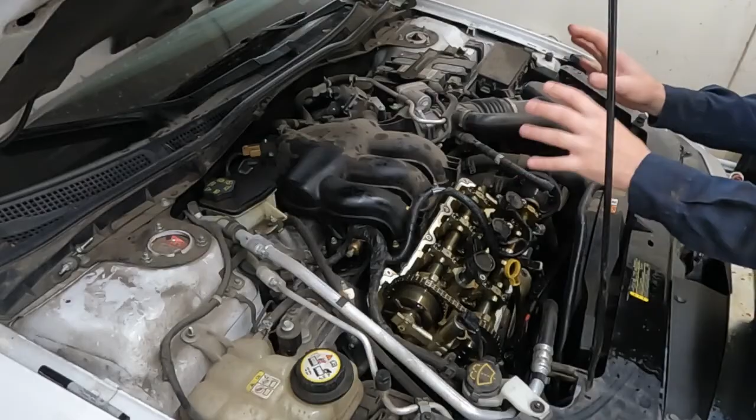All right, so this is where we are. We already have the front valve cover off because of the diagnosis. We had to pull it off so we could line up the chain and the timing marks. So we are already at top dead center cylinder number 1 because of our timing marks.

Getting this cover off is super easy. Everything is right in sight. You're just pulling off the coils, unplugging them, unplugging this here. This harness gets all moved out of the way, and the oxygen sensor comes unplugged. And really, it's just the perimeter bolts, and then there's 2 center bolts.

The dipstick tube, there is a bolt down here. You can get it with a 13mm ratcheting wrench or a little shallow socket. Well, actually, it has to be a deep socket - it's this bolt here, so it is a deep socket to get over this little stud. I used a ratcheting wrench, that was just really easy for me to get it out. But anyway, that has to come off to be able to move it just a little to get the valve cover up. That's the only kind of secret - otherwise, it's super easy to get to.

So the first thing we're gonna do is go down, pull the serpentine belt off, and get that crank pulley bolt busted loose and the crank pulley off. That's gonna be the hardest thing of this whole job. If we can't get the crank pulley off, then we can't really proceed, so there's no sense in pulling all this stuff apart if we're not able to get that pulley off.

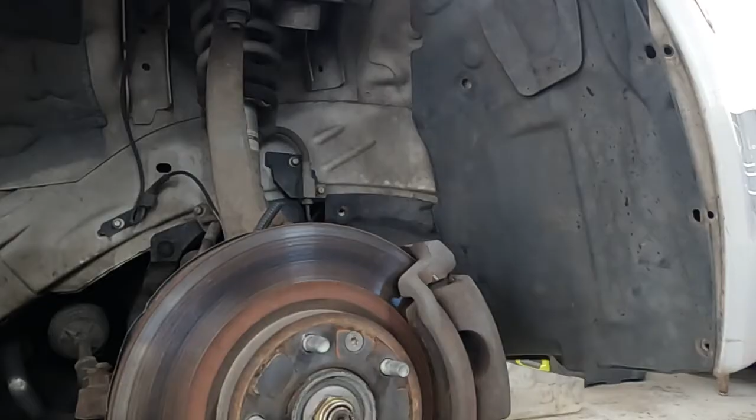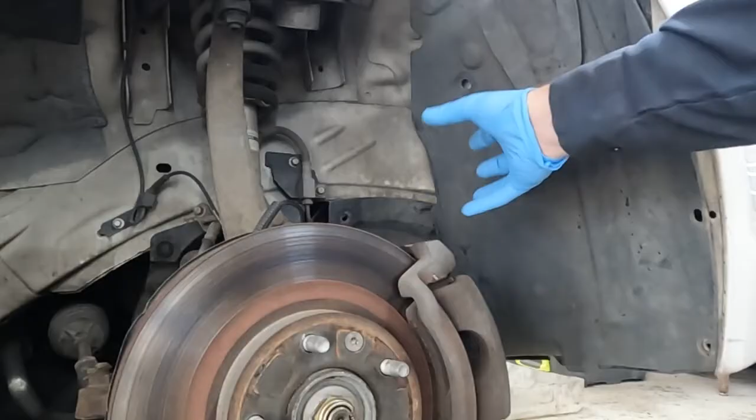All right, so the car is jacked up, took the tire off. We need to take this plastic off, there's just a whole bunch of clips. I already got some of the clips off so I can bend this plastic in order to get something on it so I can turn the engine to set the timing during diagnosis.

But it looks like in order to remove this completely, we have to remove even this bigger wheel well. It all looks like clips, at least from inside here, so having a pair of pliers like this is really helpful. I'm just gonna go along and pull all these. I got all the clips I can see. Looks like this just pops out of its thing like that.

And then that gives us access to these 2 clips here on the inside. Probably can't see it because it's in the way, but there's a clip there. All right, so now this little plastic thing can come out completely. Oh, there's one clip over here I left in. There we go, all right, so I think that's it.

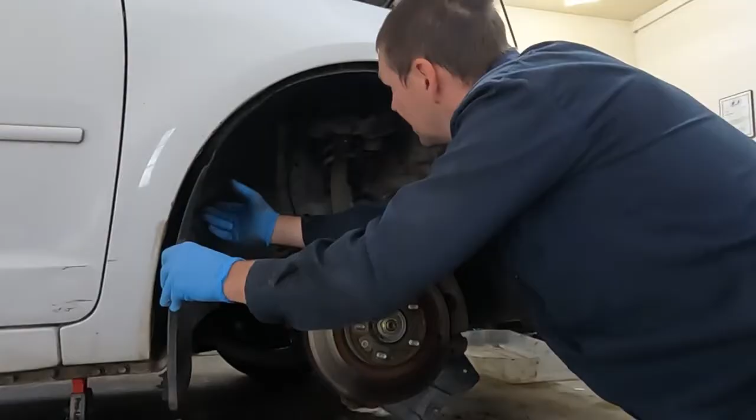I think we can actually put this back up. And I'm just gonna put one clip in it, just so it holds it up and out of the way. We just had to remove it so we can get this little thing off. Oh man, there's even one more - I guess there are a lot of clips.

Okay, so we just needed that out of the way. So now we got access to our pulley. Maybe we do want this out of the way completely - I'm gonna move this wheel well completely. It's a couple more bolts, looks like 1, 2, 3, maybe 4 bolts.

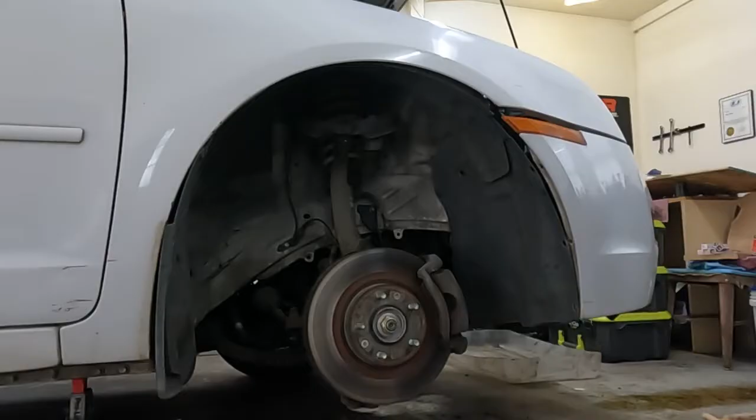Show you where I am, I'm just on the front underneath here. They're 7mm or 9/32, whichever one you got, and there's 4 of them. So now this whole thing will come out completely, and then we just don't have to worry about it. Not too bad, couple minutes and then it's completely open.

Crank pulley bolt is an 18mm. Didn't think my Ryobi was strong enough. Earthquake XT - for the price, this thing's a beast. Let's see if it can bust it. No problem, all right, so we got the bolt off.

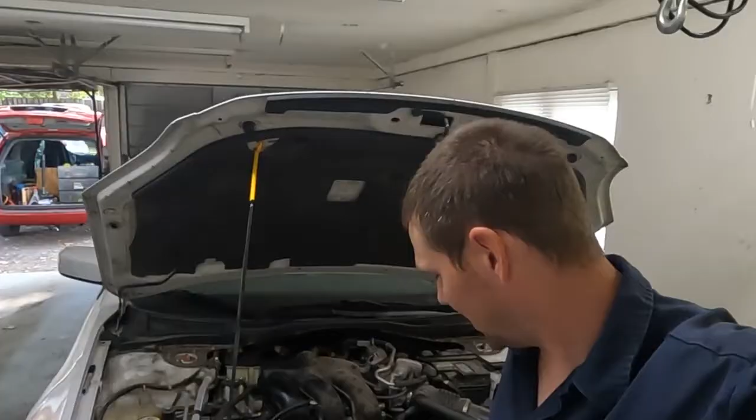Let's take the serpentine belt off before we pull this off. Now it's pressed in as far as I know, so we'll have to take a puller, a 2-jaw puller or a 3-jaw, and pop it off. All right, got the pulley off. Sorry I didn't film it - there just really wasn't a good place to set up the camera so you can actually see it, but I just got it off with a 2-jaw puller, nothing special.

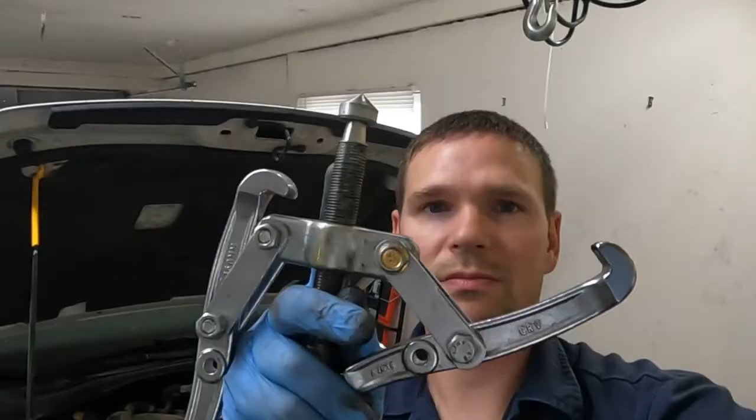Yeah, that's pretty much it. I had to use a little adapter because my puller shaft, the screw shaft part, wasn't long enough, so I used a socket as a little extension between it and the end of the crankshaft. It just fit right in, I think it was 19 millimeter or something like that, and that gave me just a little extra length to pop it out. It's not pressed in too crazy, so it comes out relatively easy, but we got it off.

Excellent there. Now we're gonna hop back up to the top, start pulling off the intake, the other valve cover, and working that way.

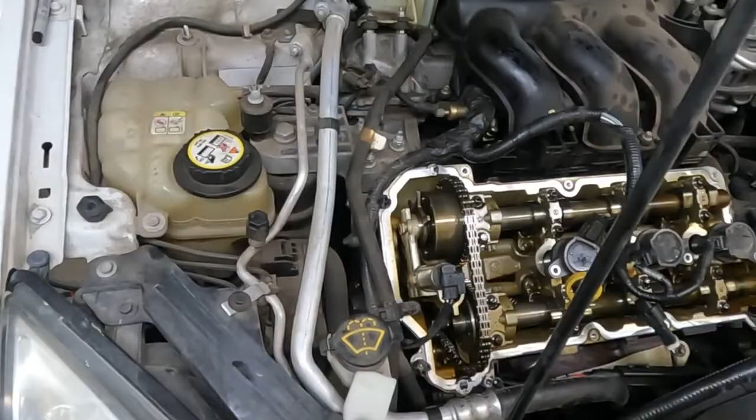I'm hoping the filming will be okay, decent enough. If I can't film it on the car, I'll maybe take a picture or film the manual. So that is next, pulling the intake off. We'll probably have to pull all the peripherals off of that before it comes up and out, and then we can get to that back bank over there.

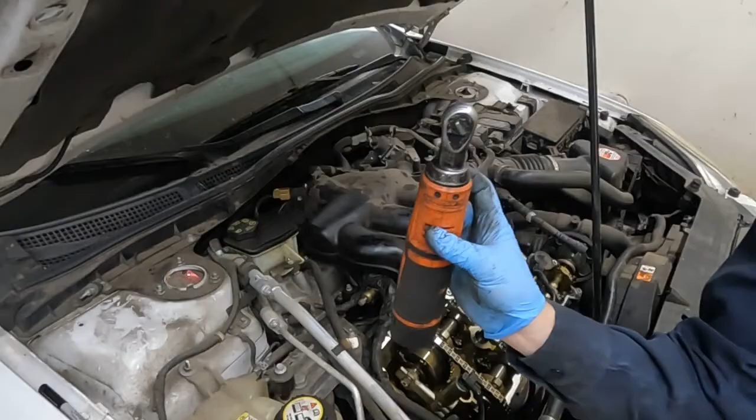I'm gonna start over here with the air box. Just pop this off, the electrical connectors. If it has this red tab on it, the tab just has to be pushed back out of the way, and then you pinch the connector and pull it off. I'm not sure why they do those tabs, like a little safety tab or something. A number of manufacturers utilize that style.

8 millimeter, a lot of these will be 8 or 10 millimeter. Pull that off, let me see if this will just slide off somehow. You want to separate this boot from this hose. There we go, it just pops off. Another 8 millimeter.

Loosens that up. Alright, put this right back here. So it didn't really have to come off, it helped coming off just to give me more room to pull on, but otherwise they can stay on. I'm just trying to think what else. You know what, let's take it off.

I'm gonna put the bolt back on just so we don't lose it. But we're gonna pull the whole thing off right here on the back of the intake, just with a pair of pliers. There we go, and that whole thing can just move out of the way.

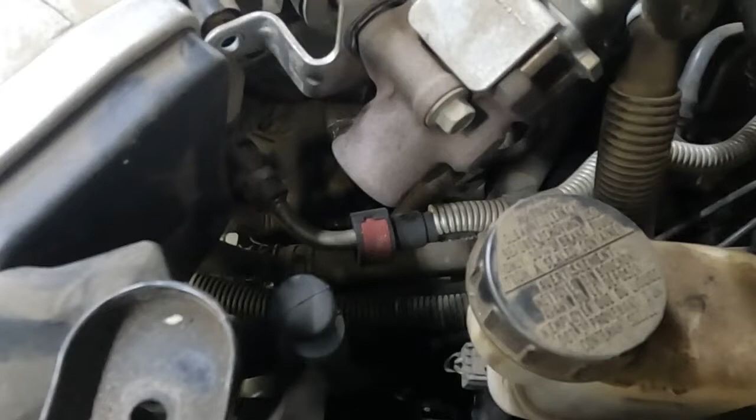Okay, we're stuck on something. Might just be this EGR if we pull it back enough. Not quite sure what we're hanging up on. Oh, I see. Let me pull you around and show you something I wasn't thinking was attached to it. I thought it was the fuel rail, but it's right back here - you see this red connector? That has to come off the throttle body. When I first saw it, I thought it was fuel rail related, but it's not. So we're gonna pop that off, and then we should be home free from there.

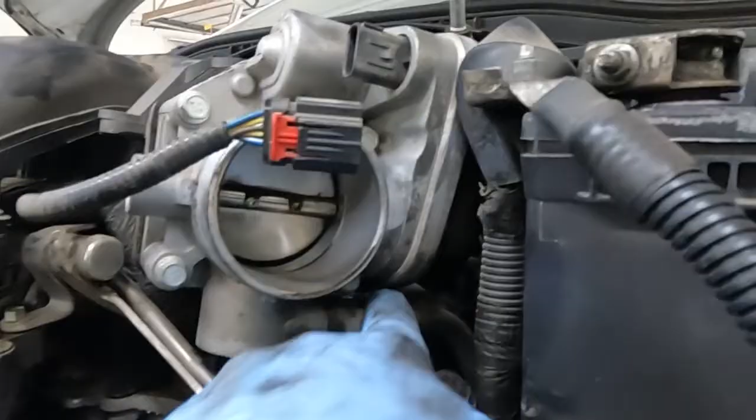So there's actually 2 more hoses at the bottom of the throttle body, right here and right there. What I'm thinking is we'll just pull the throttle body off. There's 4 bolts here, and it looks like it'll just separate from the intake, and then we don't have to worry about all those hoses. 10 millimeter, we'll pull those off.

So let's take this off. Before I do that, I am going to disconnect the battery. It's an 8 millimeter. Because we'll be working around the alternator and stuff, it's a good idea to disconnect the battery so we don't short anything out and regret it. I used to tell myself I'll be careful, but alright, so now got this one.

And I know some of you will be asking about these gaskets - should they be replaced or not? They are rubber gaskets, let me show you. As long as they're still supple, and when they're put in their little groove they extend out from the groove just a little, that's good enough. You can reuse these, but if they are hard, brittle, or no longer protrude from their groove, then go ahead and replace them.

Okay, so I think that will solve our issue. It only solves part of it because that red connector still goes to the plastic. Let me get some pliers, we'll get this off. Get a different pair. Okay, there we go. Now that should be it.

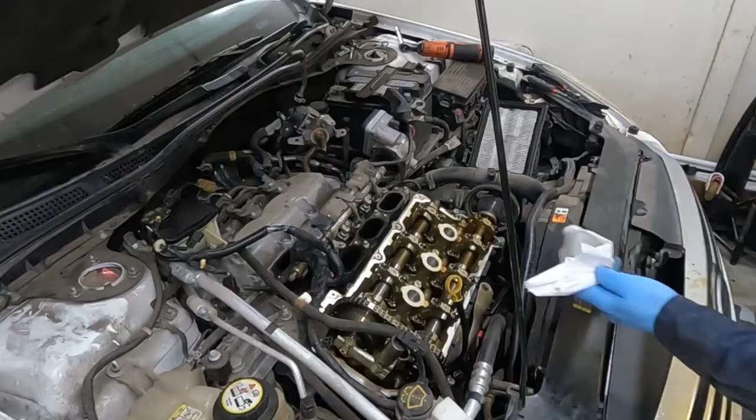Okay, so let's keep plugging away. Get this off, let me get a vacuum cleaner. We're just gonna suck up everything we can. And we are gonna put rags in the intake so that nothing falls down.

All right, so let's just start unplugging stuff. Making our way, we got this little - I don't know what that is, a little pressure sensor for the PCV system. We got all the ignition coils, can come unplugged. Remove the ignition coils.

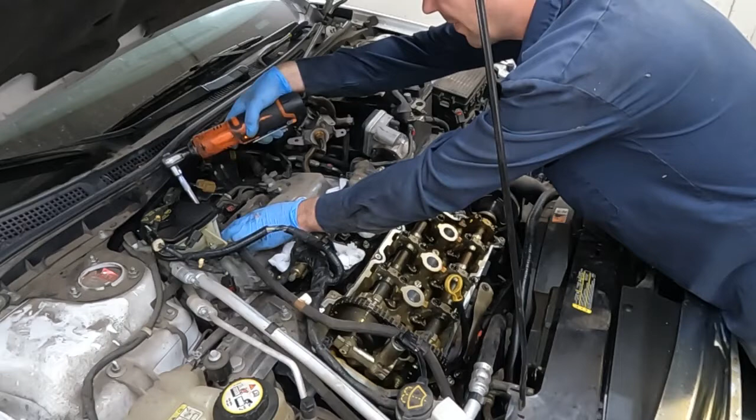All right, looks like this thing is gonna be next - power steering. Like I said, everything's either an 8 or a 10 so far. I guess there has been one 13 in the front for this tube. I think this power steering reservoir is gonna be a pain in the butt.

So there's a little bracket on the back with an 8 mil. I don't know if you can see it, probably not, but there's the variable valve timing solenoid connector on top. We'll pull that off, might need a flathead screwdriver to push that tab in. Disconnect this here too, it's like a little radio suppressor or something right there. And then we'll have to disconnect the cam position sensor once this little engine mount is off because I can't get my hand in there at the moment.

Okay, what else? I want to pull these studs off with a 10 mil ratcheting wrench. I have a feeling they're gonna get in our way. They're just the studs that held the power steering pump on, or the pump reservoir, I mean.

So in the back here, there's a harness connected to the valve cover, we're gonna get with these pliers here. Just pop them up. Okay, and then there's a bracket back here as well, held on by an 8 millimeter. You'll feel it with your hand. I'll pull you around and show you once we get more stuff undone.

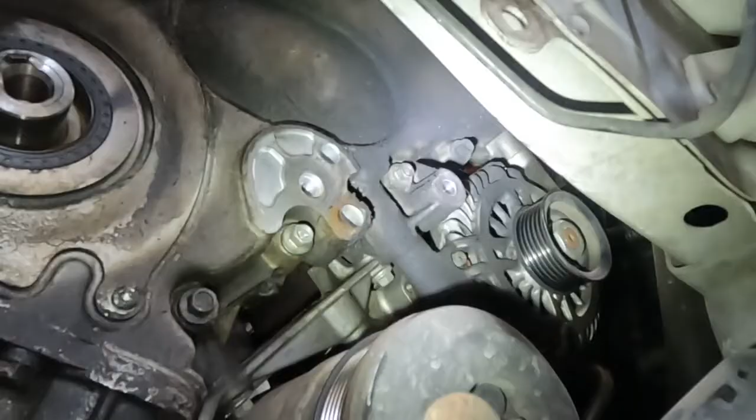From underneath, there's that one - that's an idler pulley. That one there is the tensioner pulley. And then another idler pulley right there. Those 3 come off, pretty easy, got enough room to get in there. No big deal. I believe it's 2 15mm and 1 13mm.

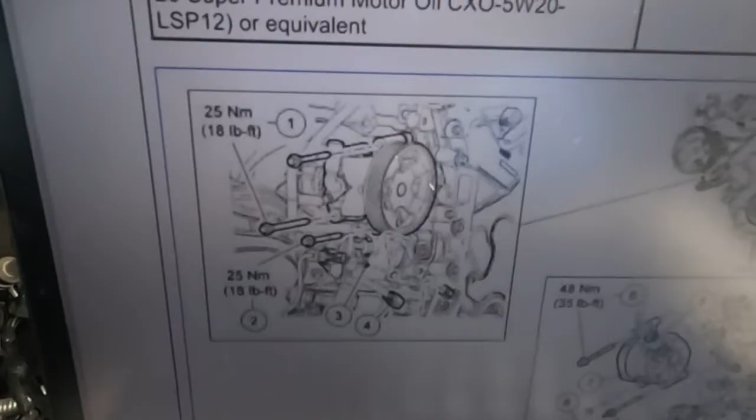So this is the power steering pump. There will be 3 bolts, 2 on the bottom, 1 up above. The one up above is a little hard to navigate with your finger, but if you look at the pulley here, it's just at the top and inside of that pulley, so you can feel it with your finger. I believe those are 10mm bolts.

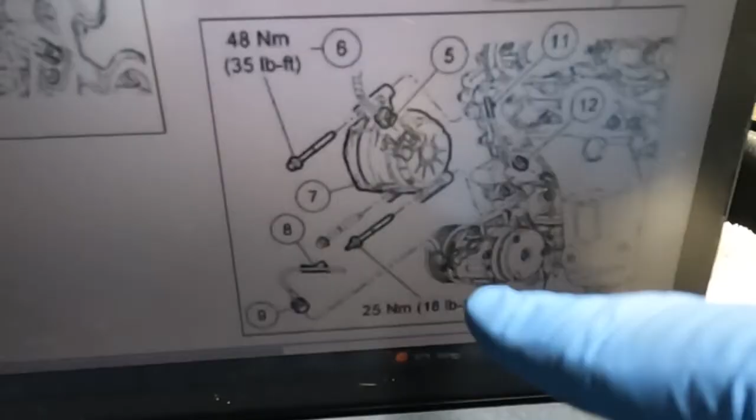Then when it comes to the alternator, kind of the same idea. It's right above the AC compressor. 1 bolt you'll get from the top, 2 bolts from the bottom. This is the front for the alternator, and right up above - let me point it out - right there is the top bolt, right under that AC line. This might be the hardest to get to, so I'd get that first while the alternator is held in place by the other 2 bolts.

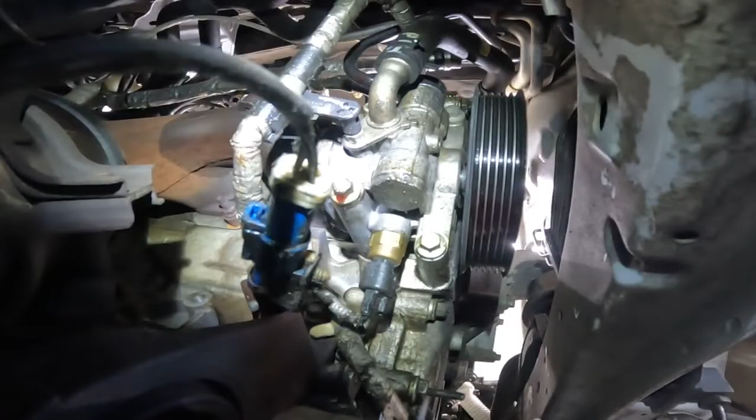All right, so I'm underneath the vehicle. I can't really show you that top bolt, but I'll put an arrow where it should be. You can feel for it, but there's those 2 bolts on the bottom you can get to fairly easy from underneath the vehicle. That one from the top, you'll just have to feel for it with your fingers, put that socket on there, and I believe those are 10mm.

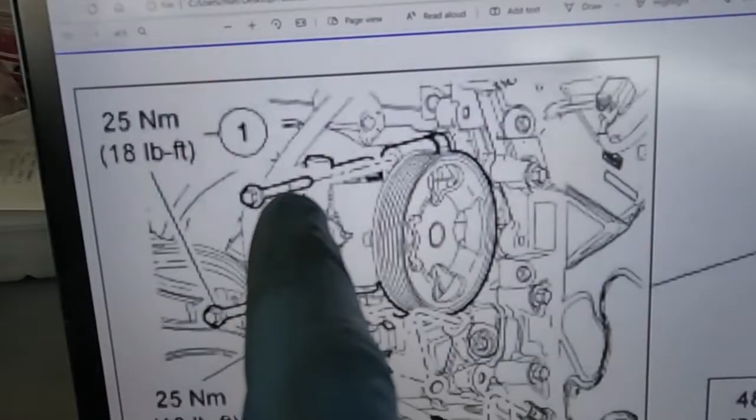I'll go ahead and do that probably off camera just because of the limited space we have to work with. On the power steering pump, in order to get access to that top bolt, there is a banjo bolt right here for the power steering line. That banjo bolt has to come off first, otherwise there's not enough room to get a socket or wrench on this top bolt. So first the banjo bolt, then we have access.

Just so you can see the banjo bolt, I pulled it up a little. It goes to this line here and just goes into the power steering pump. It's a 19mm head. Once you break it loose, it's not on too tight, and it pulls off pretty easy, giving you the room to get that bolt off.

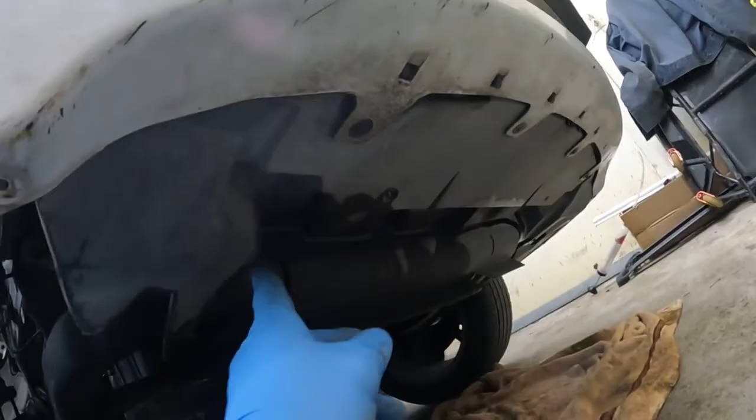So I'm going to remove this front splash shield because I can get to the alternator bottom bolt from here at an angle, going in with a long extension and a socket. It's just a matter of these little screw fasteners, and then a couple of clips that pop out, and this whole plastic shield can be removed. Now with that off, it gives us access to that bolt there.

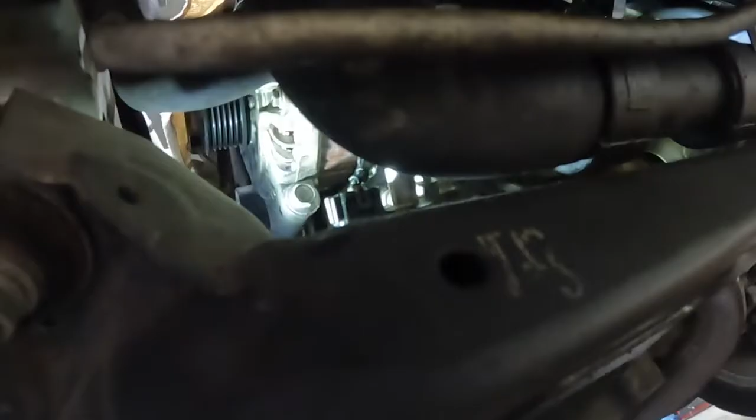Also, while I'm down here, I'm just going to note this for the customer - there's a lot of dirt and oily stuff all over that AC condenser. That's going to block the flow of the AC and block the flow of the radiator to an extent, so I just want to point that out. Pretty nasty looking, all up in there, you can see.

All right, alternator and power steering pump are out of the way.

What also helped get that alternator bottom far bolt was having a little wobbly extension as well. A long extension and a wobbly going up through the frame right underneath that lower radiator hose - that's what got that. The other one on the bottom, further in, is just a deep socket, really easy to get to.

So now I put this motor mount back on because I knew I wasn't gonna be here for a couple days. I didn't want the jack just sitting under it in case the jack bled off. So I put this back on. So now, next move, pull this back off.

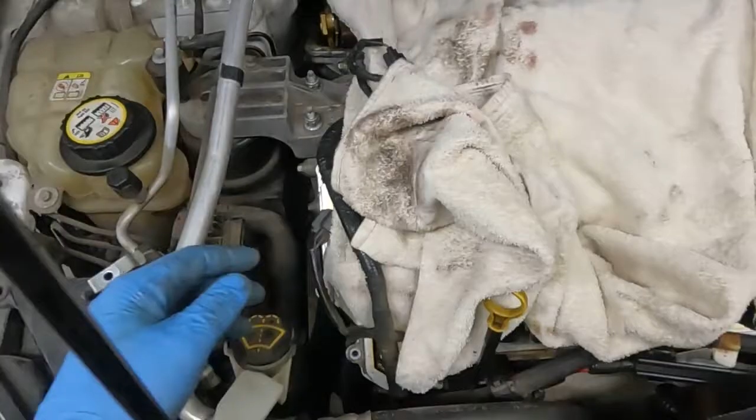We gotta pull this off because this motor mount down here has to come off. So just a couple of bolts here, and this just moves out of the way enough to get those other bolts. This whole mount can come off. Again, we'll have to put a jack underneath, jack it up with a block, and then we're ready to pull the front cover bolts off, and hopefully this front cover just smoothly comes over and up.

All right, for our coolant bottle, we're gonna want a 10 deep. Just 2 of those. Hopefully everything will play nice, and it'll just be easy to maneuver. But no, it's not.

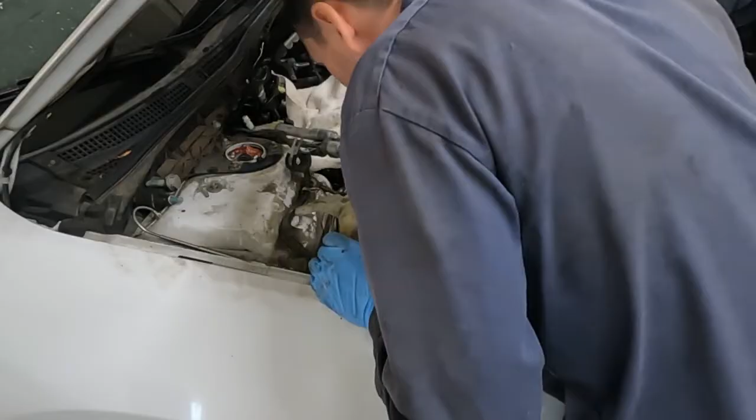See if that gives us more room. Nice. Now we got this one down here. And I'm really hoping to not have to drain the coolant. So that gives us, I think, all the room we need.

Let me see if I can get a socket in on that one. Okay, so these are all 15 mil, so having a 15 mil with a really long extension - yeah, should be able to get all of them. Oh wait, there's this angled one I wanted to see. Yes, so just up like this is all it needs to be. Let me move you around. So we'll get this angled one right here.

Okay, comes off pretty easy. And we'll get these 2 straight down ones. Okay, that one's not coming out. Let me do this other one. That one came out, so this front one's kind of struggling.

I'm just gonna use a breaker bar. I think having the extension is a little too wobbly, so it loses its power. Let me try again. So that bolt broke coming out - just something to note. All right, let me put the jack underneath real quick.

We'll jack up the engine and then pull these off, and this whole thing should separate. All right, these are 15. All right, this should just come out like that. Just put this back with it. All right, now this thing should also come out.

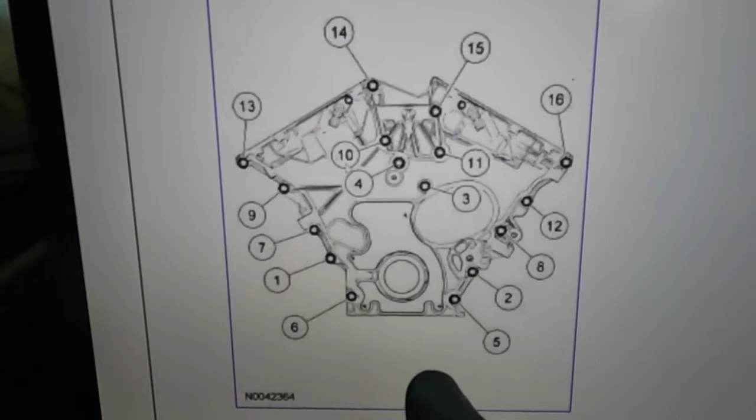Now we're ready for the front cover bolts. A series of bolts on this side, looks like 1, 2, 3, 4, 5. A few in the middle up top, and then 1, 2, 3, 4, 5 on the side. And then this doesn't show it, but there's 2 on the oil pan - so 2 on the oil pan in the front there also come off, and then the cover can separate.

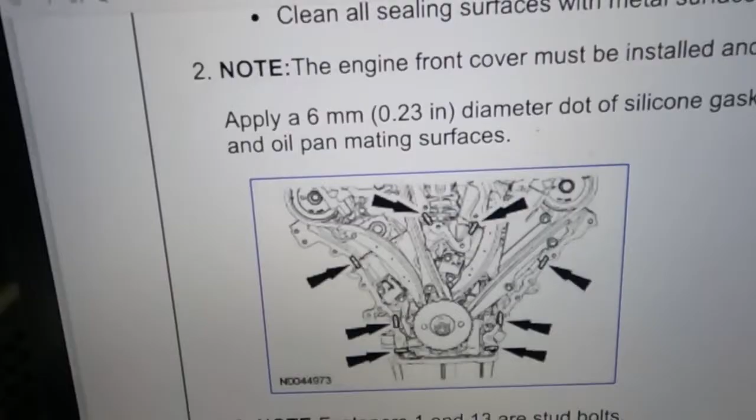Now there is a gasket right here. You can see a gasket, but there's also RTV. So it may stick - you may need something to pry on or pull on because it may stick on those RTV spots. So let's start pulling these bolts off.

Two things to note. First, the crankshaft position sensor needs to be unplugged. And then the cam position sensors up top, we want to take those out. It's an 8mm bolt, you just kind of wobble them out. Then make sure that O-ring is still good before putting it back on. If that O-ring gets damaged or it looks really flat, no longer above its groove, and it's not supple anymore - it's just kind of hardened - then we'll want to get a new O-ring before reinstallation later.

There we go. It was just gluing itself to the RTV. Just keep pulling - I want to be careful where we put our pry bar. You get a vacuum cleaner right in there real quick.

All right, got the front cover off, the timing cover. Let me show you real quick. So look right there, I put an arrow on it. I'm gonna pull up on the chain and look at that tensioner.

See how it sucks in? It's not supposed to. There's supposed to be a ratcheting mechanism that prevents it from being sucked in like that. The other one on the other side, when I did it, that ratcheting works so that you can't - that's all the loose it'll get. This side, total failure of that timing chain tensioner.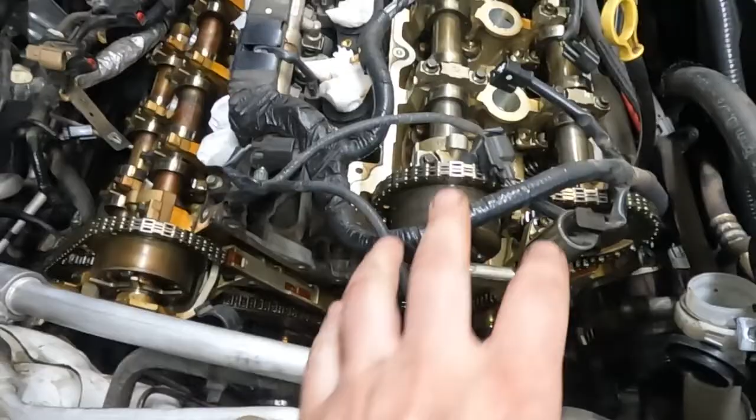Another interesting thing, if you look at the color difference between the two heads, this is kind of a gold color between the cam lobes and the phaser. That's just varnish that happens over time as the engine oil heats up, often from lack of maintenance. But on this side, nice and shiny, the phaser's nice and silver, the cams are silver, everything looks new. Makes me wonder if this head had been off at one time before, maybe it's a new or rebuilt head. Just interesting, doesn't really mean anything.

All right, we got the front cover off. That's a big win. The hardest part of this whole thing so far has been the alternator and the valve cover on that firewall side, those two were kind of a challenge. Other than that, all the other bolts are pretty simple.

Let me show you real quick on the front cover, there were two bolts that I missed, so just something to keep in mind for where all the bolts are. Other than that, just patience, a lot of patience, your hands might get banged up a little in a few places. Let me show you the front cover, then we'll take a nice break and start changing out the timing components.

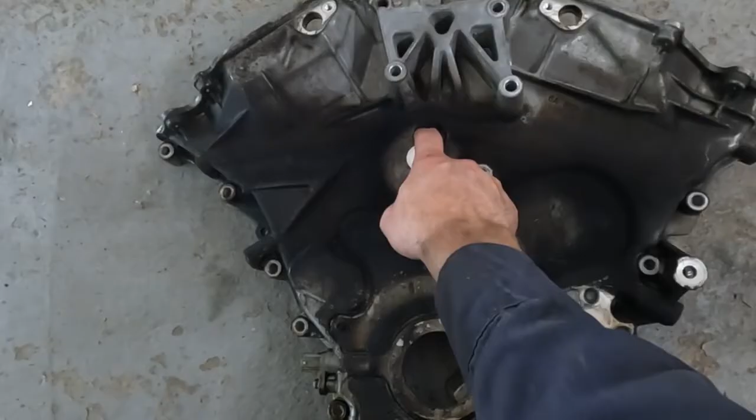There's this bolt here, kind of hidden from your eye view, with a bolt inset there. And then a bolt here, mine was just dirty and I overlooked it. So those two bolts in the middle, and then we have five on the side. Two of these, the bottom one and one up here, are studs. Those are 15 millimeter bolts, the rest are 10 millimeter. Then you have the two for the oil pan, those are 13 millimeter. Other than that, then prying, you just gotta be careful where you pry.

Let me flip this over. You don't want to pry anywhere that's going to damage these sealing surfaces on the head side. Same within here, you don't want to damage the head side sealing surfaces. And when you're prying in this little valley here, you just want to be careful of the cam, phasers, the tone ring, and all that. You don't want to bend any of that or you'll have drivability issues and have to pull all this back apart.

So our next move is taking care of the timing components. I'll launch you over to the computer so we can see step by step the process. Filming's not going to be the best because of the tightness and angles of things, but the tensioners come off, the guides come off, and the chain can slip around stuff and come off. We want to set cylinder number 1 to top dead center, I'll show you what that looks like. Once that's set up, then we can start pulling off the tensioners and guides and stuff. Let me show you that real quick and then I'll launch you over to the computer.

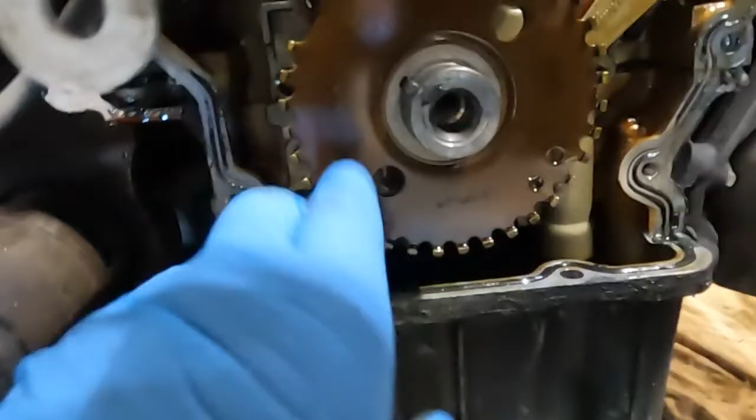So this is the left bank. You want this timing mark right here, kind of matching this plane on the head, and then the crank pulley, or the crank keyway, you want at 11 o'clock. If that's at 11 but this mark is over on this side, then you're 180 off, go ahead and spin the crank one more turn to make it 11 o'clock, and then you should have that mark there. So that's how we know. Also, this mark here is kind of straight up and down on the rear bank or the right bank over there. And now we're set at top dead center.

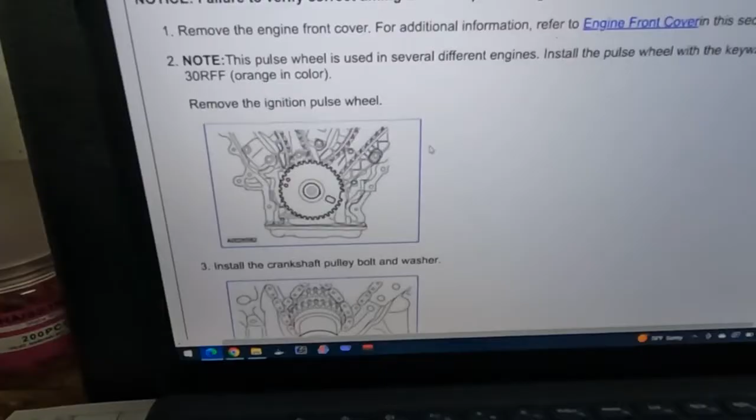All right, so we want to pull off our tone ring right here. The pulse wheel is used in several different engines. Install the pulse wheel with the keyway in the slot stamped 30 RFF, I'll show you that when we pull it off. But there's actually two little keyway slots on that tone ring, and we can actually put it in the wrong place because they use this same tone ring on two different engines, or multiple engines, it says. Pull the spark plugs off, that just helps rotate the engine a little better with the spark plugs out.

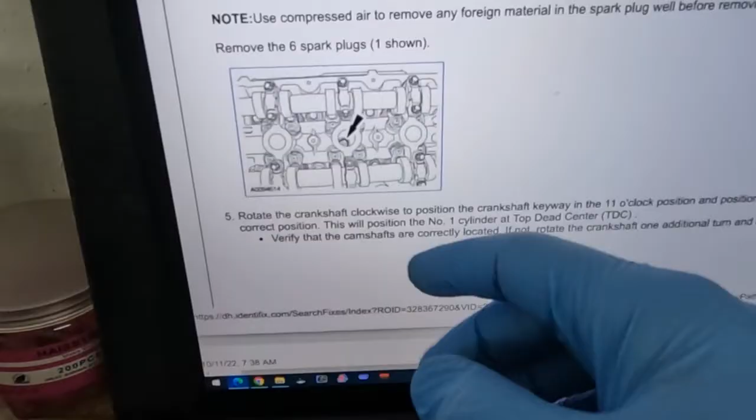Then you're not getting fighting compression. Now this is saying pull off the VVT assembly here. I'm not sure if you have to do that. I'm going to try and do that without doing that portion of it, but that's what it's saying to do.

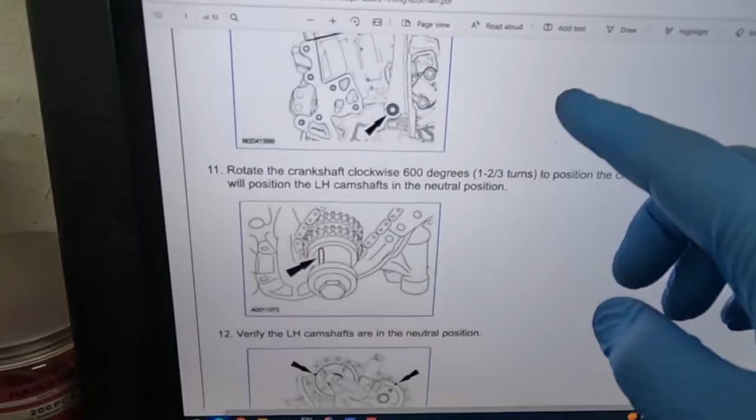Usually if they say it, then it's because it's needed, but I'm always trying to find ways around stuff. So you want to do the right hand and the left hand separate. All right, so these are the important steps. First we want to put the crankshaft keyway at 11 o'clock. These are the marks here, the timing marks when you're at top dead center.

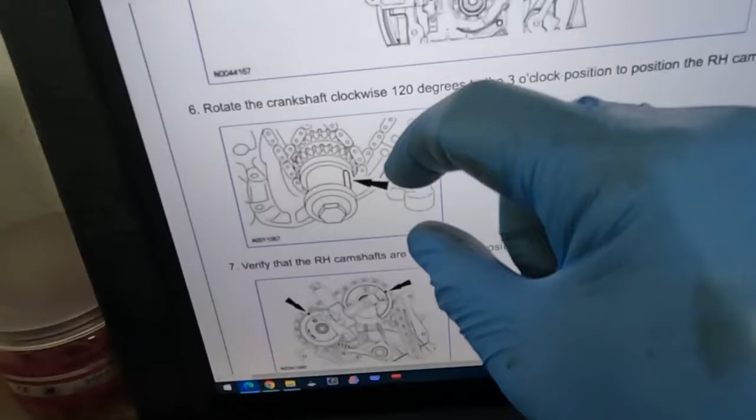But then it says rotate the crankshaft clockwise 120 degrees to the 3 o'clock position. So now the crank is at the 3 o'clock position there instead of the 11 o'clock. And that puts the right hand camshafts in the neutral position. And then this should be the timing marks there on that right hand cylinder head. Now this timing mark goes off to the right. It's no longer straight up and down, but it's over a little.

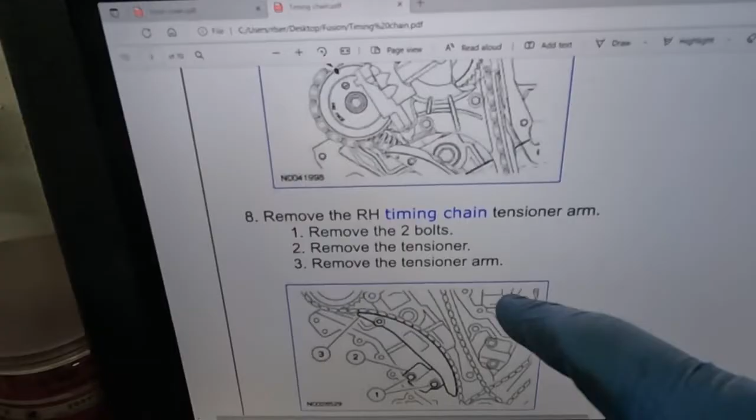Now we can go ahead and remove the 2 bolts for the tensioner, and then that tensioner arm, that arm here, we could pull off as well.

So on the vehicle, the manual was saying take off this VCT solenoid assembly here. You don't have to. Once you get the timing chain off of the exhaust cam, you got plenty of slack that you can just slide it right over. So this doesn't have to come off like the manual's saying. They may have you taking it off because it's explaining a deeper teardown than what we're doing. But just to get the chain off, you can leave this on.

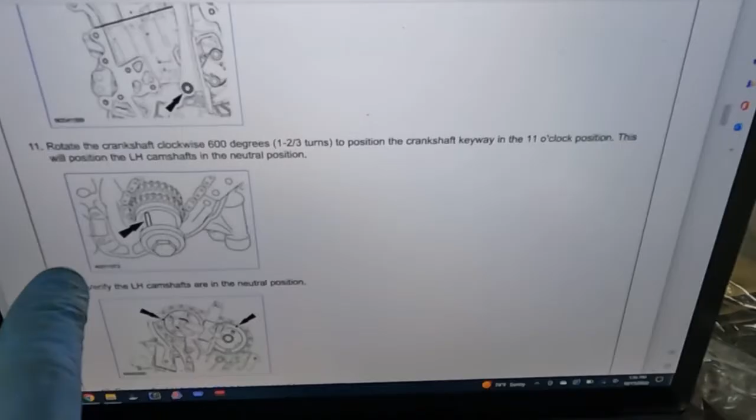Once we have that right hand side off, then we can go ahead and get to the left hand. We want to rotate the crankshaft clockwise 600 degrees. So that's going to be another full turn plus 2/3 of a turn to put it back at that 11 o'clock position. So that's all we're doing, is putting it back at the 11 o'clock, but not one turn to get it back. We want to do one turn plus an additional to get it back at that 11.

And then once we got that lined up, go ahead and do the same thing. Remove the tensioner, or remove that guide or that tensioner arm.

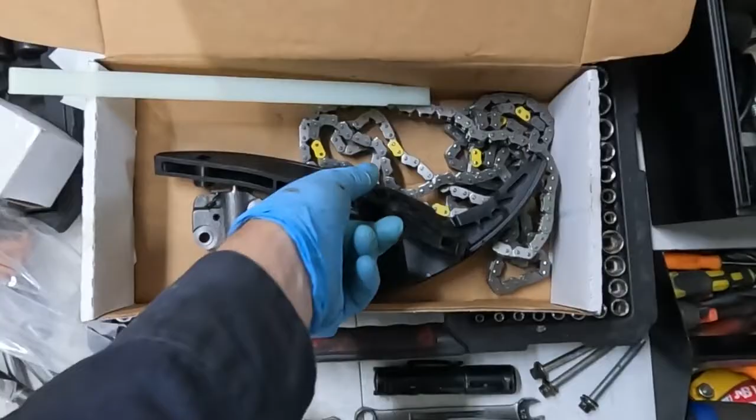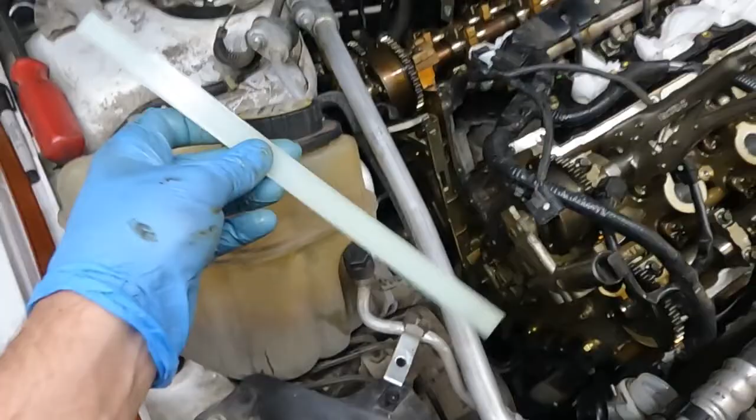So here's the kit. It's just a Cloyes kit. It looks like the chains, the tensioners, the guides, and everything are not side specific, so it doesn't matter which one you put on which side. They're identical components. For these strips here, they go on these long runners here. There's one here, there's one right here. On the back side, there's a little tab that you just pull and push, and then this whole thing can come out like that. And then a new one can get slotted in. You can see these little slots, they just slide right in and lock into place.

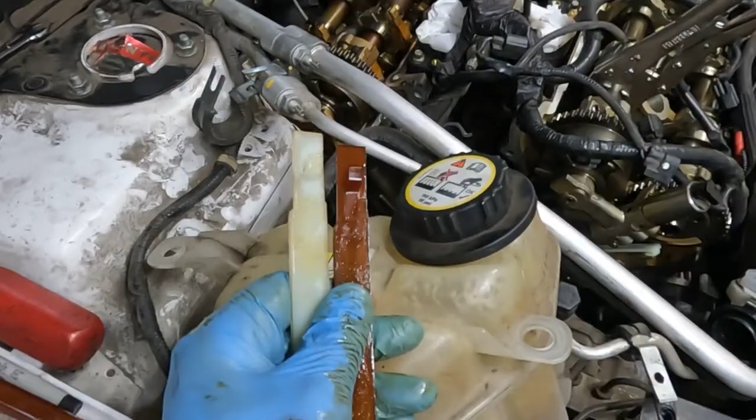All right, real quick, there's a difference on these right there. You can see it, I'll point it out with an arrow. I think it's just a manufacturing kind of hiccup. So that on the new one needs to be cut off or just trimmed just a little because it's not on the old one, just that little nub there.

So now all you're doing is taking these chains. They have these yellow marks here. The 2 closer ones go on the cams, and then that one goes on the crank. And all you're doing is lining up that tooth over that dot on the cam. And then there's another dot right here on the cam.

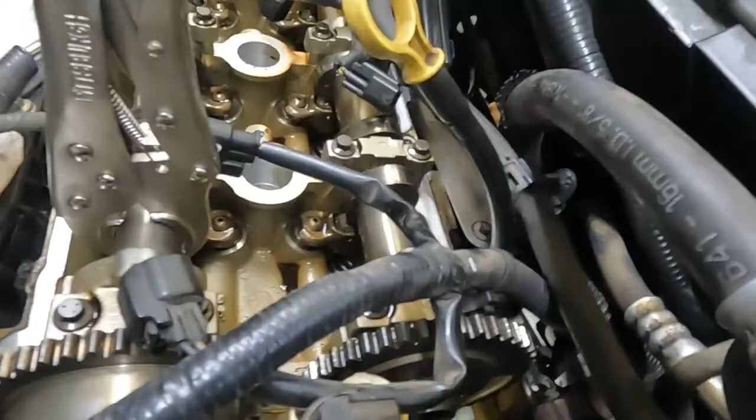And this cam is gonna have to be moved just a little by hand manually. No big deal, just use a pair of vice grips, not on the lobe, but just the shaft in between the lobes. And then you can move it just ever so slightly as needed. No big deal. And then same on the bottom. You want that bottom yellow on that little mark on the crank, and that will line up our left hand.

So this is what yours should look like. On this side, I have that yellow mark right above that yellow tick.

Same on this side, yellow mark on the yellow tick. And then to get this little tensioner arm on, I had to use a flathead screwdriver and push on the chain a little to get it over, just enough to slide this behind it.

Now down on the bottom, our mark is right in line with this front tick, so perfectly straight back. So now our crank is set. If you have to move the crank, that's why I have the bolt back in. If you have to move it one way or another, just a couple degrees to get that tooth to line up, that's no big deal. It's perfectly fine. Just like we moved the cams a smidge to get those marks to line up, it's perfectly okay to do the same on the crank.

So that tensioner is tightened to 18 foot-pounds. And then to do the right side is the exact opposite of how we took it off. So we turn the crank 120 degrees to make it the 3 o'clock position.

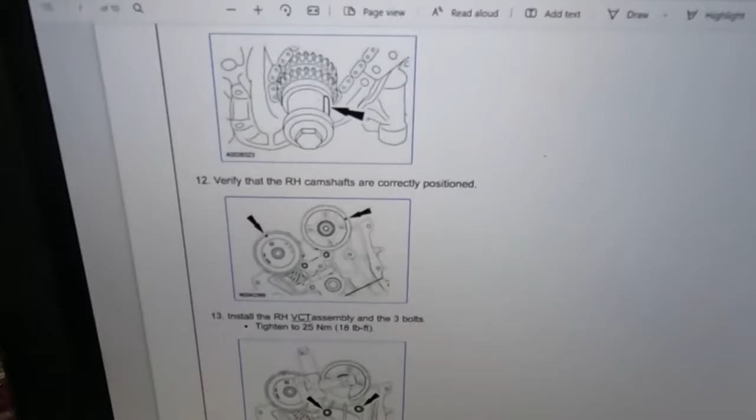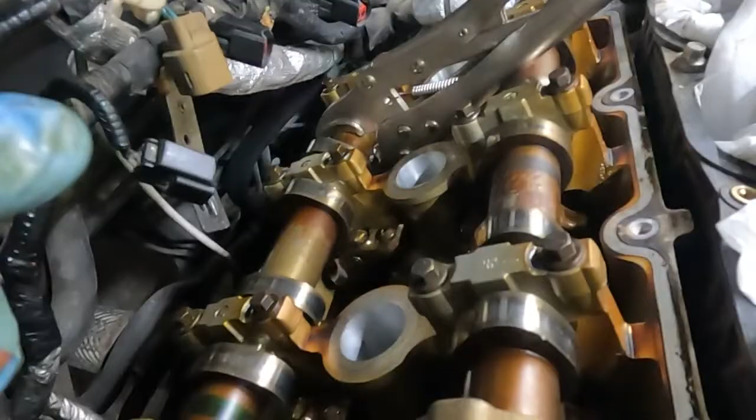And then we go ahead and do the cams just like we did on the left hand, putting that yellow mark on the little indent on the cam, same with the other cam, and then line up the crank. With the 3 o'clock, now our front one is going to be lined up with that dimple just like the rear one was. And then up here, again, we want it to match up. And then that back one is kind of hard to see, so you can get your phone back there, take a picture. That's what I ended up doing, so we can see right there that back one is lined up.

Double check these marks, make sure they're still lined up. They're still lined up. And then down there on the crank, they're still lined up. Now we can go ahead and pull our little pins. So now we'll turn the crank twice. That little keyway is at 3 o'clock. We'll go all the way around and then back to 11 and check our marks one more time. Make sure nothing internal with the valves or anything is getting stuck on anything, and it's just a nice smooth rotation. All right, so we are back at 11 o'clock.

So we just want to make sure these line up. Our colored links will no longer line up, that's okay, that's normal, we just want to make sure this goes back where it's supposed to go. This is now more parallel, just like we wanted, just like this. So that puts this side back to where it should have been from the diagnosis. This one is right there, the other one is over here, so it looks like they're right where they need to be. And then the bottom, of course, it's not gonna line up with the marks, but you can see we're at 11 o'clock there.

We can go ahead and take this off, and we are ready to start prepping the surfaces of the head and the block. And then the oil pan, we just want to wipe that rim really good with some brake clean. Wipe all our surfaces off really good. Get any of this leftover RTV, we want to peel that off and get it out of the way. Now don't use a metal scraper, we want to use a plastic scraper to get all that, because we don't want to score up the metal with a metal scraper.

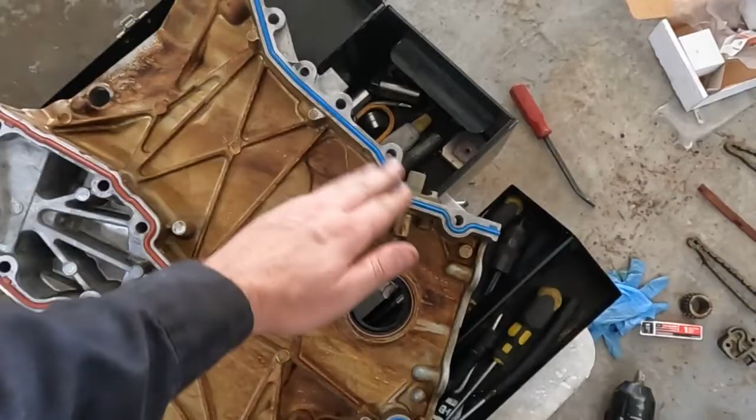We got the gaskets, now they only go on one way, so you can't get them wrong. And then, so first, before you put the gasket on, clean up this surface really well with some brake clean, get all the grease and stuff, because that's what the silicone is going to stick to in a few places. Then go ahead and lay your gasket in, and that's it. Then your front cover is ready to go.

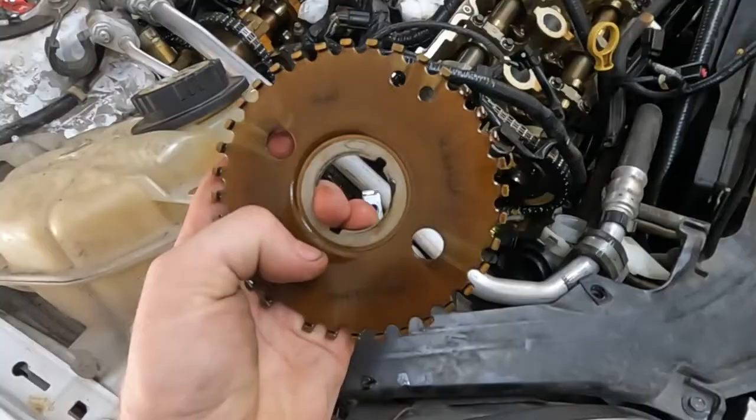Last thing before our front cover goes on is this. Now you notice there's two different keyways that it can line up on. Here it says, hopefully you can see that, glare's kind of bad, but it's 30 RFF. It's this one right here that we want. It is also stamped front, so you don't accidentally get it turned backwards. It only goes on one way.

All right, so I'm waiting on some RTV to come, so I think this is a perfect time to take a break. But when we come back tomorrow, we'll slap everything back together, fire it up, and listen to it roar.

Good morning, it is the next day. Today is the day. We're gonna get this thing put back together and back on the road. Let's get started. So this is where on the vehicle we need RTV.

You can tell on the vehicle there's a little crease right here because the head meets the block, there's a little crease. Where the bottom pan meets the block, there's a little crease. So you just want RTV in that crease, the corner. Now I'm going to go ahead and just RTV the entire lip of that oil pan, just because I don't want to leak.

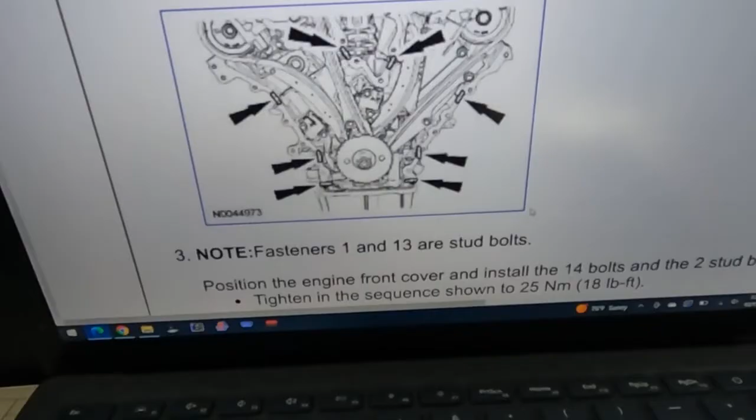And that gasket isn't as malleable as I would like it. It's a little too stiff, so I'm just gonna RTV that whole lip. And then on this side, again, a crease, and then in the middle, there's 2 more creases. And you'll see them on the vehicle, what we want. Let's see what it says.

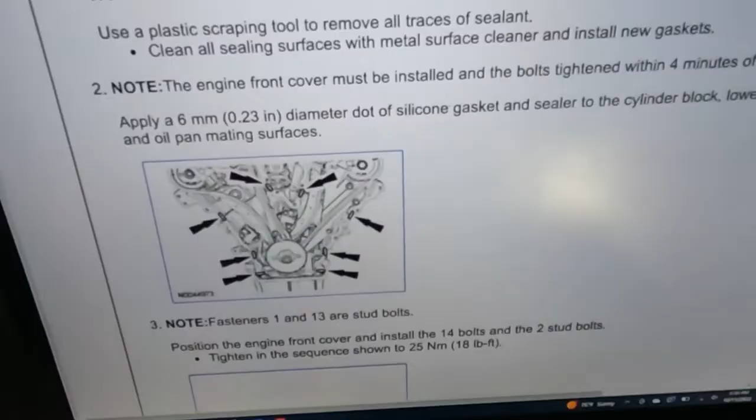Apply a 6mm diameter dot of silicone gasket sealer to the cylinder block, lower cylinder block, cylinder head, and oil pan mating surfaces. So I went ahead with brake clean and cleaned off our surface one more time before I applied the RTV.

Now there's 2 patches of RTV where those seams are, there and there. Over here, there's a patch right there where the seam is. Down here where a seam is, let me go under, I think it's easier to see. So you can see RTV there. There's one up. And then the corners, right where the oil pan is, those 2 corners get a little RTV as well. So anywhere there's a seam, it gets RTV.

Well, it kind of came out at an angle. We want to be careful of our gasket. Don't want to nick it or bang it up.

Okay, so what if I went in this way instead? There we go. That wasn't so bad. So the trick is to put it in this side first, and then this side will just fall into place. Easy peasy.

Now I did nick the gasket on my first try, so I know where I nicked it. I'm just gonna RTV in that spot. It doesn't take a lot of RTV because it'll squish out and fill in the little gaps or imperfections quite well.

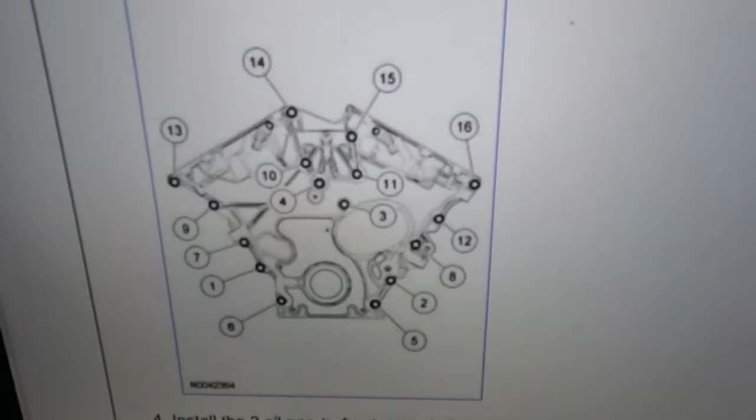Just snug these in. All right, here is the sequence for tightening. Go ahead and pause, follow that pattern. Hopefully the numbers are showing up okay. And then last, we wanna tighten the 2 bottom bolts for the oil pan. All of them are tightened to 18 foot-pounds.

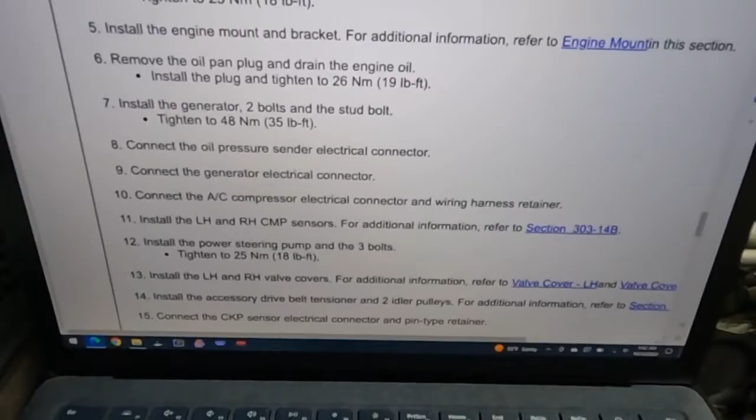All right, now all those bolts are finished, so the front cover is buttoned up as far as the bolts. So now we want to install the engine mount bracket, and then I'll go to that to give you some torque specs. And then we want to drain the oil, and then install the alternator.

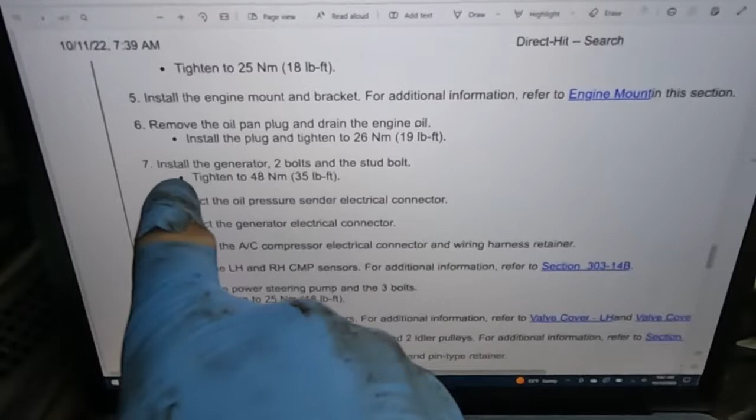Those are 35 foot-pounds each. And then anything we had to take off to get the alternator off - we didn't actually disconnect anything from the alternator or the AC compressor, so we don't have to worry about that.

We want to put the cam position sensors back in. Those are, I think, 89 inch-pounds, just snug, not really tight. And then we want the power steering pump bolts. Those are 18 foot-pounds for that.

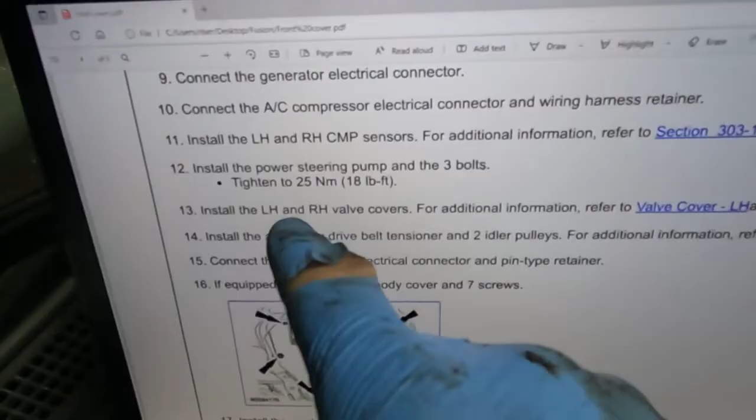And then we'll go ahead and put on the valve covers. So let's go ahead and catch up to at least that point. Let me go to the engine mount stuff real quick.

So here's the engine mount stuff. Go ahead and pause here, and then you have all the torque specs necessary. These 3 nuts, 46 foot-pounds. This little bracket, we actually didn't take it off here, this is the ground strap, we took it off the body. That's 89 inch-pounds, just snug.

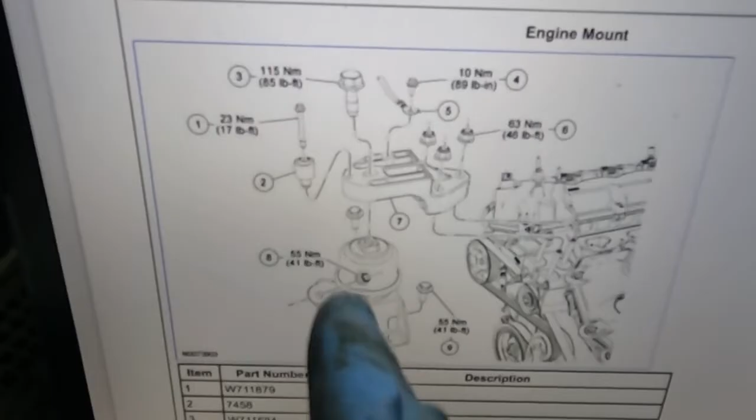Our big center bolt here is 85 foot-pounds. Then we have 17 foot-pounds for that little damper. These are 41 foot-pounds, those 3 bolts. Now we did break one, we're gonna have to figure out what to do with that. Not sure if I can extract it, but either way, for you guys, it is 41 foot-pounds.

That'll take care of the engine mount, and then we can get rid of the jack. And then also when the engine mount is done, we can put this back in its place and bolt that back up as well. We're doing the valve cover next.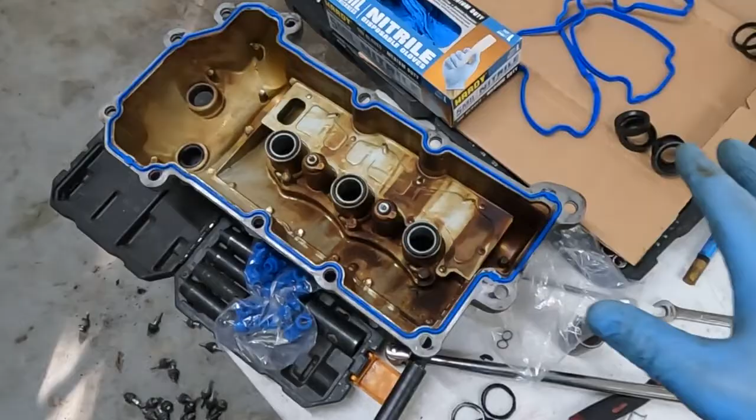This is the front. We just want to clean off really well the channel inside, any RTV we want to scrape off before setting this new gasket in. The gasket has a left and a right. This little dip here for the water pump should make it pretty obvious which gasket goes where.

For our spark plug seals, we want to pop those out. Having just a little angled pick like this makes it easy to get the old ones out, and then we'll slap the new ones in.

Anywhere where there's these little square pieces, there's 2 on the back, 2 on the front, that's where RTV is going to go, but on the head side, not on the cover itself. We just want to wipe that off, maybe we have oil on our hands from working. Before putting this cover on, we want to make sure those are clean with just a little bit of brake clean, making sure they're nice and oil free.

Then on the head, anywhere there's a crease where RTV was, we want to make sure the surface is nice and clean. It doesn't typically take a scraper since it's a rubber gasket, though the RTV may take a little scraping, but mostly it's just a rag. You want to wipe from in to out, not out to in, so you don't get dirt and debris inside the engine. In to out, wipe off your towel, in to out, wipe off your towel, all the way around to get it nice and clean. And don't forget these for your spark plug seals.

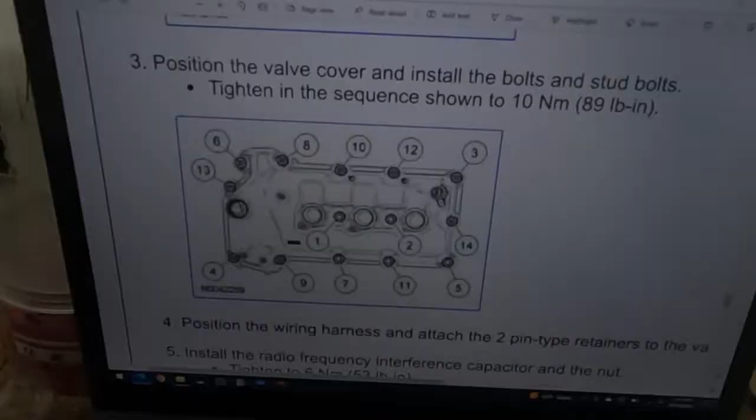This is the tightening sequence, starting right here in the middle, so the middle 2 first, then just follow. Number 3 is up in this corner, number 4 is in that corner, 5 in the corner. Pause here, look at the pattern, that's how you want to tighten it to 89 inch-pounds. That'll be the same on both valve covers.

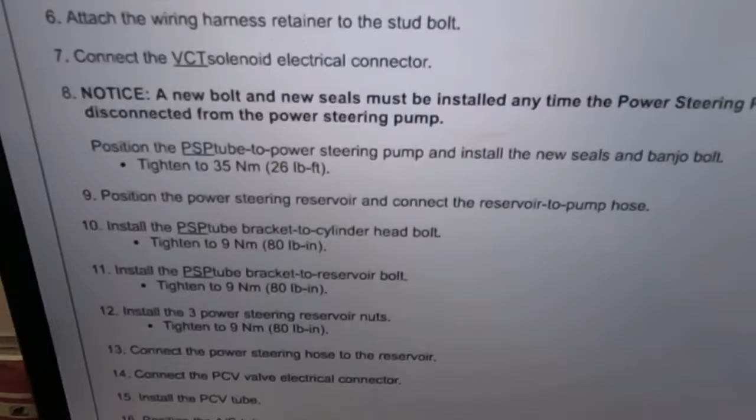Now in the back, it's saying to tighten up that banjo bolt on the power steering pump after the valve cover is installed. We'll see how that goes. I may do it before anyway, but that banjo bolt is 26 foot-pounds.

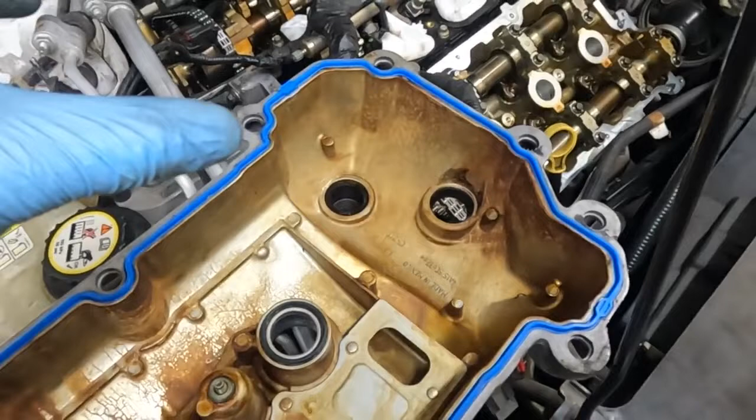Just a little tip, using silicone paste as a lubricant for your variable valve timing seal here can help it slide on over that seal a lot easier. We'll be using this later as well on the front cover seal. Before we put our crank pulley on, we'll lube up that seal too so it slides on really nice and easy.

So I'm going to put this back on the power steering pump before the cover, because I don't think I'll have enough room once that cover gets in the way. The manual does have you pull off this cowl, so it's up to you. I can see the amount of room you'd gain, especially for this one bolt, but we got it off without removing it, so I think we can put it back on without taking that off.

So I'm just going to do it in the order that I did it. Put this on first. Don't forget, there should be 2 washers, an upper washer and a lower washer. If you put it on and forget that lower washer, you will have a power steering pump leak, so just something to keep in mind. You need 2 washers. And then this bolt, you can see there's a washer right there, so don't lose it, don't drop it in the engine.

Oh man, that would be a very sad day as well. So just be super careful doing it. But if you feel more comfortable having the valve cover on so it doesn't drop in the engine, and then you pull this cowl off, that's entirely up to you.

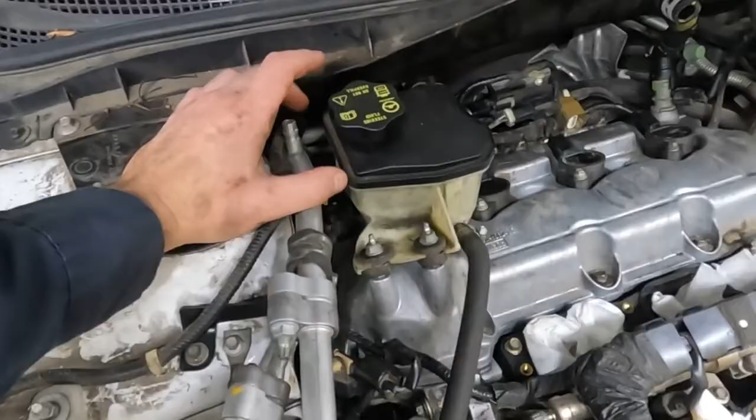So we got both valve covers on. Again, the front was super easy to do. The back actually was a lot easier. I did the bolt for the power steering pump first before this came on. Did not cause any issues.

The power steering pump reservoir, the fluid reservoir, I took this hose off so that I had more maneuverability. So when it came time to plug in that back big fat hose, I had a little more flexibility with it. Kind of a booger to get in, having a pair of pliers on it and trying to push this on, but it is doable, just a little booger.

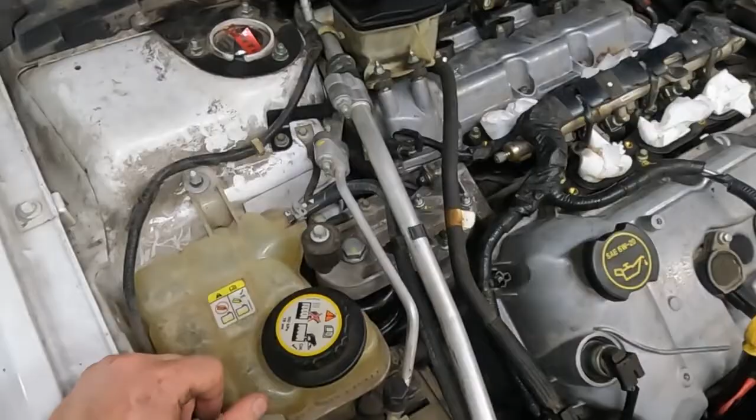Then we got the AC stuff back on. Just make sure, these are kind of flexible as far as, they're aluminum, so they can bend a little if you have to rebend them. I'm pretty sure I bent them out of shape the first time trying to get that valve cover off, so bending them back shouldn't be a big deal.

Don't forget your ground strap here. Don't forget plugging in your cam position sensors. Those will throw codes and possibly prevent it from starting. I think that's it. Coils plugged in.

Don't forget there's a bolt back here for this power steering. It's the one wrapped in, looks like aluminum foil. There's a bolt bracket back there. Don't forget that. Don't forget plugging in this silly thing there. And I think that's it.

So next, what I'm going to do is first take a little water break, get some lunch, then we'll be putting on all the pulleys and then the intake manifold, and that's it. So we're on the home stretch.

Feeling good. I did lose this bolt somewhere, so I'll keep looking for it. I left that one open on purpose because it's right there in my face, so after we get it all together, I don't forget that we're missing that bolt. It's got to be around somewhere, it's not in the engine. It probably just fell somewhere, misplaced it, no big deal.

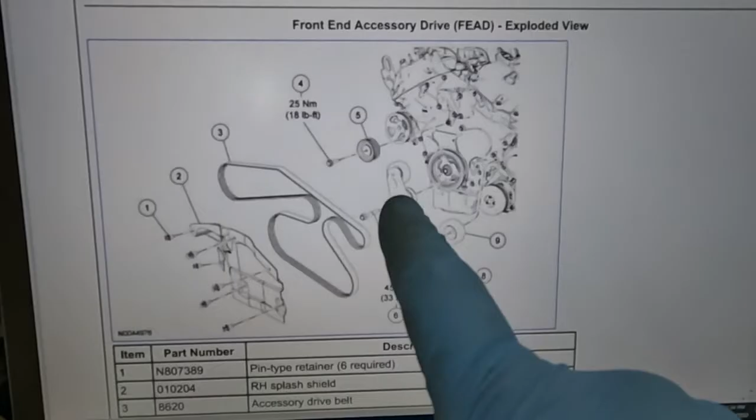So this is the pulley installation and the belt routing as well. The tensioner is 33 foot-pounds. The smooth one goes to the front of the engine, that's 35 foot-pounds, and then the grooved one is 18 foot-pounds. Now we're ready for the crank pulley.

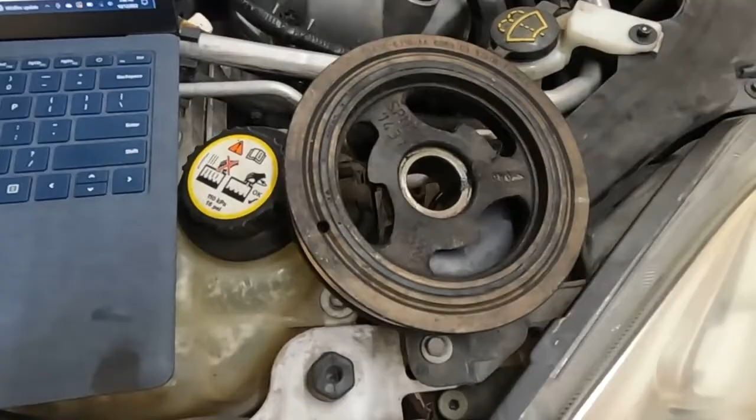What we want to do is clean out this inside really well, and then right here, that keyway, we want to clean it out. There may be some old silicone in it we want to get out. We're going to be putting our own silicone in the front here of the keyway, dab a little there, and that'll prevent leaks coming in from this keyway to the outside.

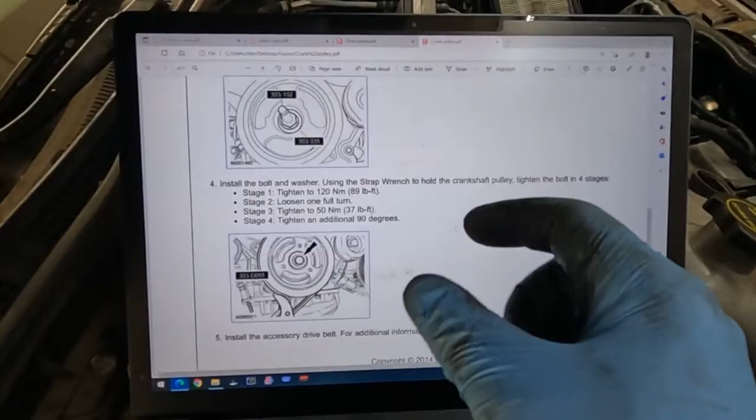The tightening sequence right here is tighten first to 89 foot-pounds. Remember these are pressed on, so that first 89 will suck it all the way in, pressing it back on. Then we want to back it out, loosen one full turn or take off that torque. Then torque it to 37 foot-pounds as the initial torque. So that one sucks it in, that one backs it off, so you're back to neutral. 37 foot-pounds, then an additional 90.

So what I'll do, just to show you, I don't have the bolt, but I'll get my 37 with the torque wrench, then I'll mark the bolt in the upward position with one tick. Then I know where to move it to the 3 o'clock, or that 90-degree movement. I'll know because that tick mark will now move clockwise 90 degrees. So that's how we'll get the crank pulley.

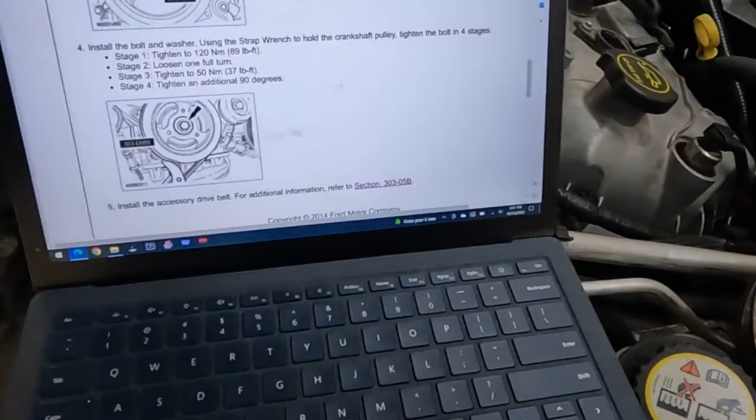That is next. One thing I forgot on this side, on the outside, we want to put a little bit of that silicone paste as a lubricant so it can slide in right over that front seal. To get the crankshaft pulley started, the bolt is just a little too short to just put it on and thread it. So take the washer, put it on like that, and then take a fat socket right here, and you may have to tap a few times with a hammer just to get it to begin to press in. Then you can go ahead with your washer and your nut to get it on.

The bolt is a little too short to just put it on, so I did it already, so we got a few threads. Now we can suck it in the rest of the way with our gun. All right, last thing on this beast is the intake manifold.

I don't have torque specs, but I'm just going to go with how everything else kind of is. 89 inch-pounds seems like the right number, but I don't have the spec. Same with this throttle body. I'm just going to go with 89 inch-pounds.

Just remember, for this manifold, the trick is you have to go in at an angle because of this. But yeah, other than that, it should just slide in, bolt in, get this back on, all the hoses and connectors, and that's it. We are ready to fire this thing up.

It's been a long couple days. It's a really heavy project, but we are just about done.

Filling up the power steering fluid. I'm just filling it up, letting it burp a little, fill it up, let it burp.

Before we start it, we'll actually just crank it a few times without it starting. We'll get some oil circulating from the oil pan into the head, because it's been sitting a couple days and things are dry. So we won't fire it straight up, but I'll show you how to do that. We can kill the injectors really simply by putting the gas pedal to the floor before starting it up, and I'll show you that in a little bit.

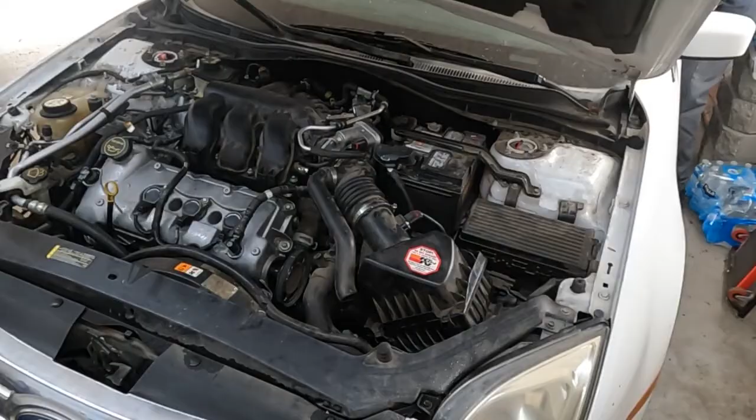Here we go, I'm going to start it up for real now, just for a quick second. All right, that was long enough. Runs smooth. I'm going to let it warm up in just a second.

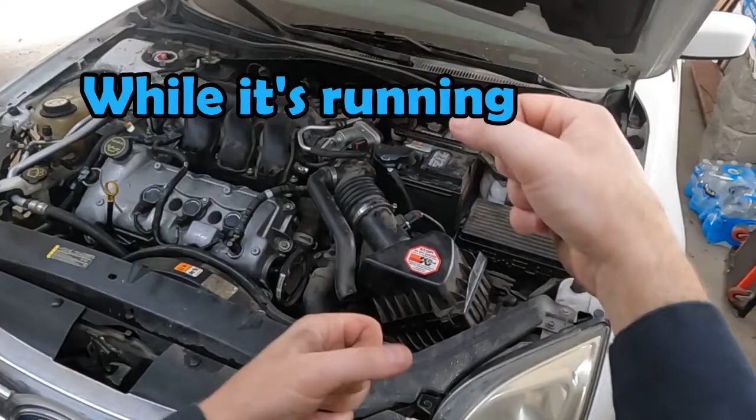There's still a few things I want to do, like top off the power steering fluid. That'll be a series of just filling it up, turning the steering wheel one way to the other until it locks, fill it up, keep doing that, and just bleed all the air out of the system.

All right, that is the conclusion of this timing chain job on this Ford Fusion. This is an '06, it spans over a couple years. It is the 3-liter V6.

A little bit technical. Anytime you're doing timing, there's a little bit of technicality in setting up the timing, where the crank needs to be, where the cams need to be. So you need to be confident going into this, how to do it.

Other than that, there were kind of just two frustrations. That rear valve cover was a little bit of a challenge, but once I figured out how to get past the EGR valve, it's really not that crazy. So in retrospect, I was making it harder than it needed to be. And then the alternator was a little bit of a struggle on that top bolt, just kind of a challenge there.

The power steering pump, not too bad actually, kind of a breeze getting that off. But that alternator... oh, and then the front cover. Once it's off or unbolted, getting it out is just a weird kind of twist thing, and it comes out. You'll see it if you're doing this, you'll experience it and go, okay, that's how it goes out. Going back in, it's a specific way.